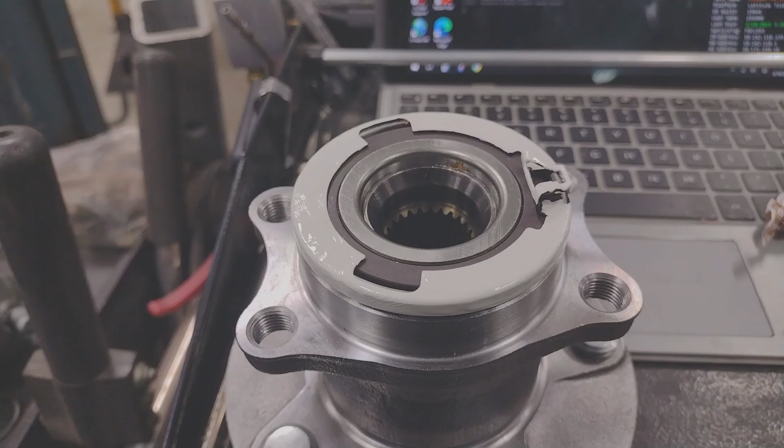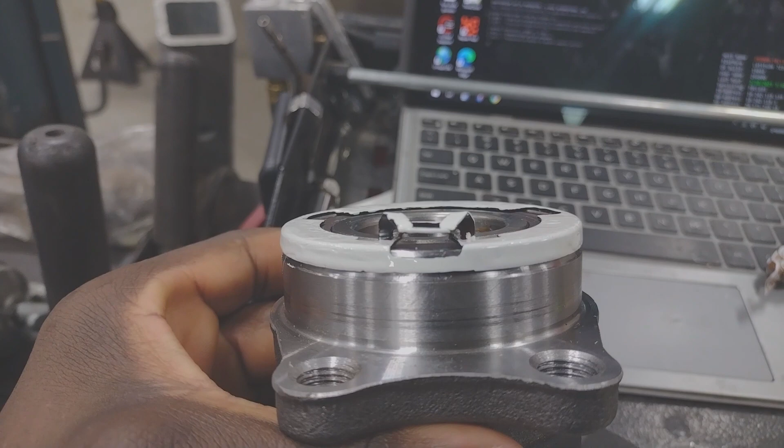Alright, so I painted it. I'm just going to paint the right rear, and it'll be a good comparison with the left rear, just to give some extra level of protection. Obviously I couldn't get all the way into certain areas where the sensor slides in. I don't want to make that area any worse in terms of clearances, so I didn't paint it.

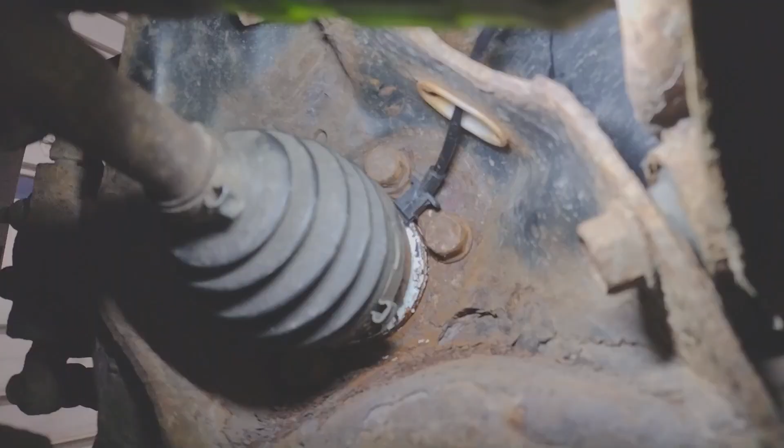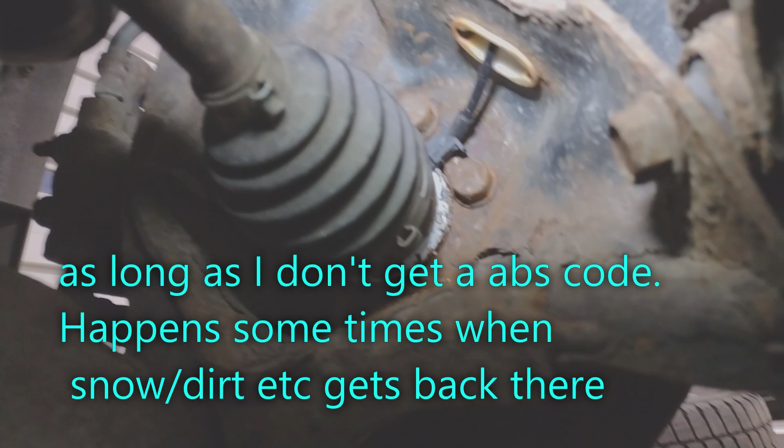Alright, I got the new hubs in, and there is some scratching going on, so the paint isn't really intact. My thought process is this is probably going to have another lifespan of 3 years. I'm guessing if I mess with it. If I don't touch it, then I should be okay. I'm going to show you the old hub.

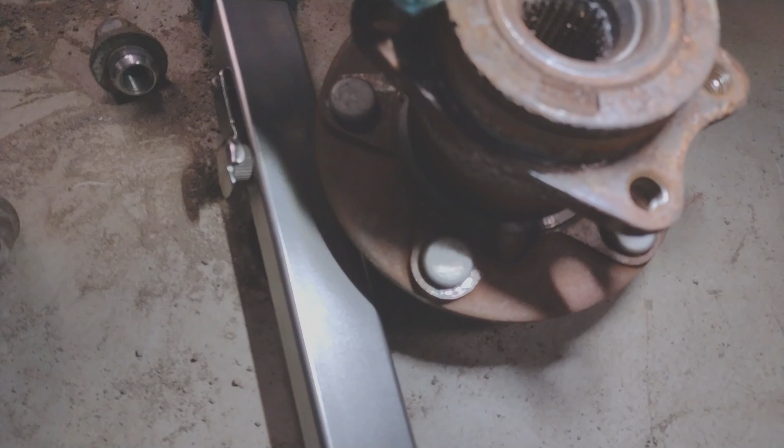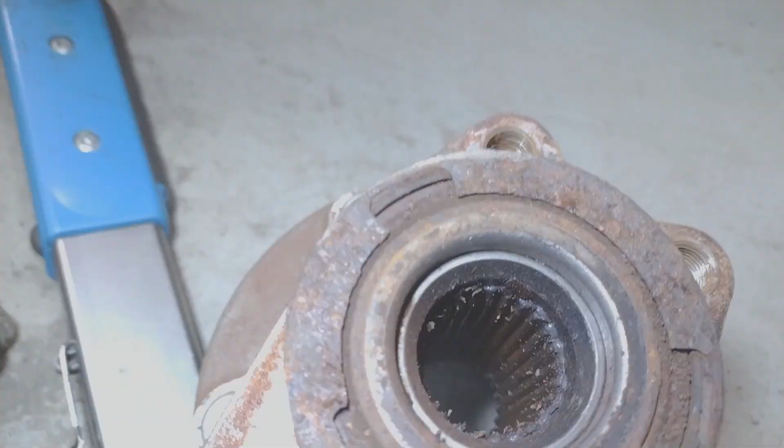Alright, this is a good side. This is the driver rear, and the clip is still intact, but it's super rusty. That's as far as I can tell with this one. That magnetic ring where the ABS reads, it does look a bit chewed up. That's hard to tell, let me see if I can focus. It looks a little bit chewed up. Well, there's so much rust - rust is getting between the ABS clip and that reluctor ring there, and grinding it down.

This side read decently, good enough that it didn't throw a code after I replaced the sensor.

Let's look at the really bad hub, which caused me all the issues, and it's always at the right rear. So let's take a look here. That clip is busted - like, it's wiggling there. It completely just disintegrates in my hand. I just don't understand.

It's possibly because the suspension back there does have surface rust. That's my guess, that everything back there is getting rusty right away. But this design is just flawed, in my opinion. The ring came off while I was hammering it out, but there's a groove in there with all the dirt getting in between and constantly grinding on it.

So I'm gonna go ahead and do a road test with the scan tool to see how the ABS reads now. But I'm sorry, the video is just blurry, I gotta change my focus.

I wonder if anybody else has this issue who drives in the elements, because I'm in northeastern Pennsylvania. This probably won't be a thing for long, because within a couple years I'll probably just buy a newer Outlander where I won't have this issue. This issue is only on certain models of Outlanders and Lancers.

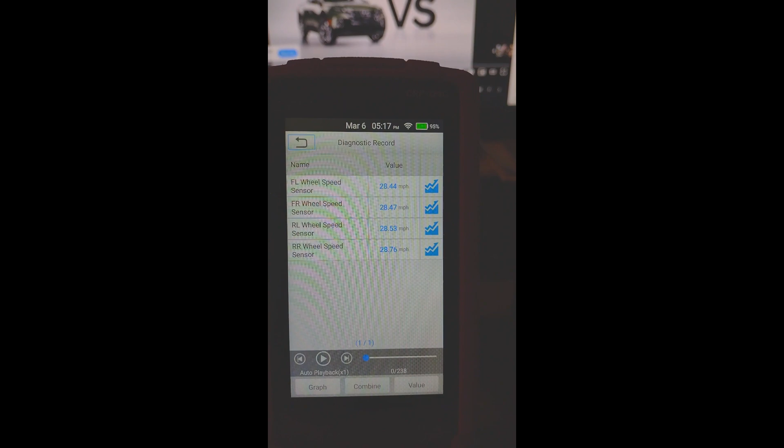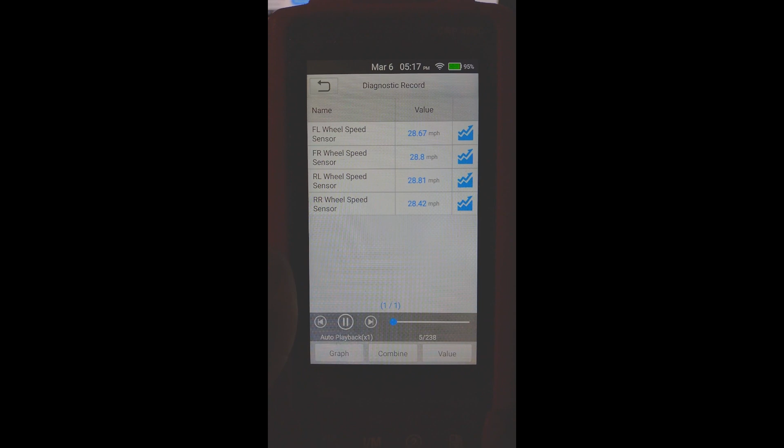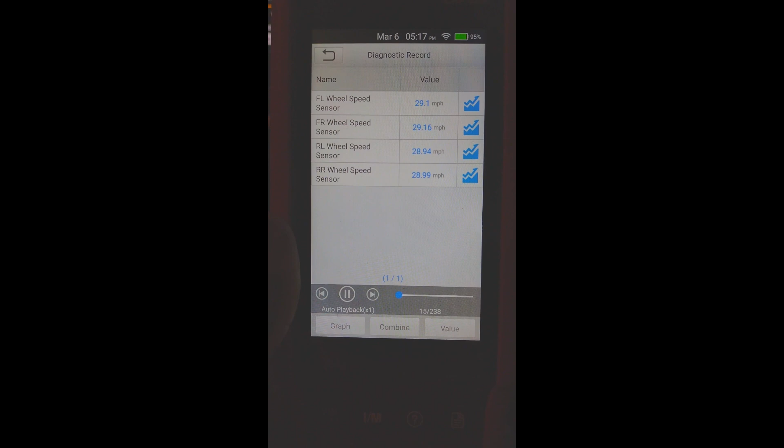So I did the log after I replaced the hub, so I'm gonna go ahead and play it and show you exactly how it's reading. Alright, so it's reading pretty evenly. I'm gonna go ahead and hit the graph button, and jump over here.

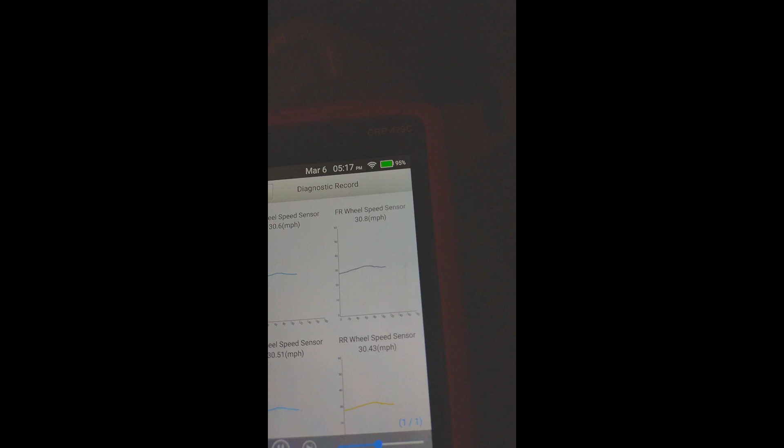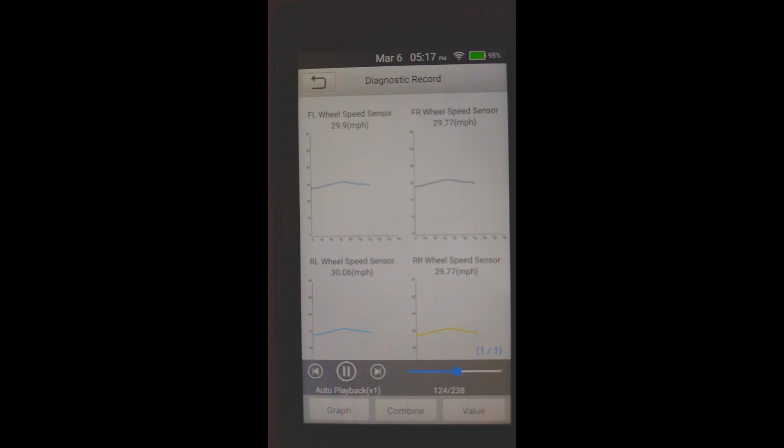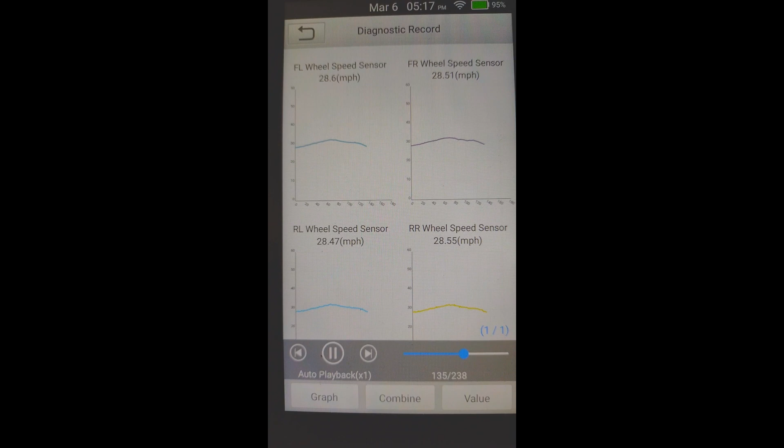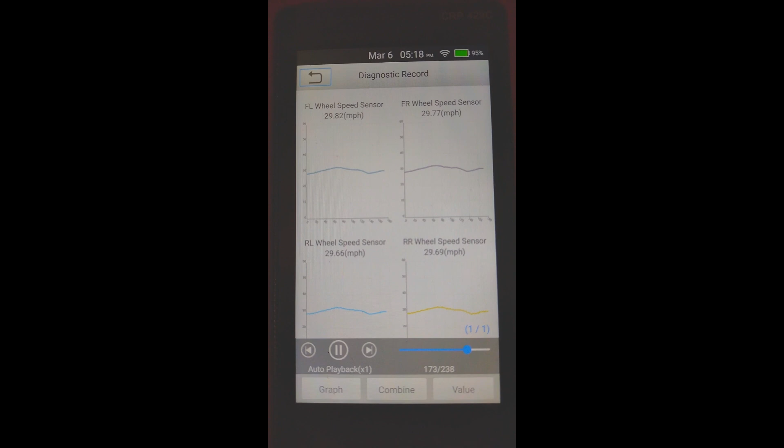But you see how smooth the graph is compared to how it was before. The rear ones aren't as smooth as the front - let me see if I can get a better view. So the rears are not as smooth as the front, and I think it's just because of the hub design. There's going to be just a little more variation. I was going to say the system is not as picky - it is, but it has its window for how picky it should be for the sensors. So the rears are pretty close to the fronts, pretty even. A little bit fuzzy there in the graph, but everything is going well.

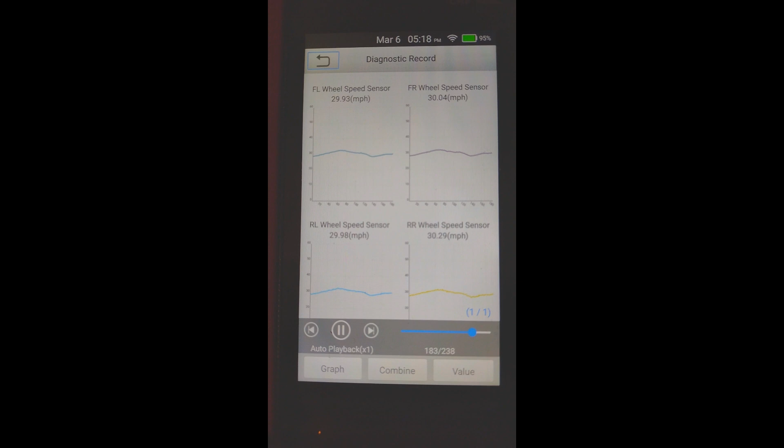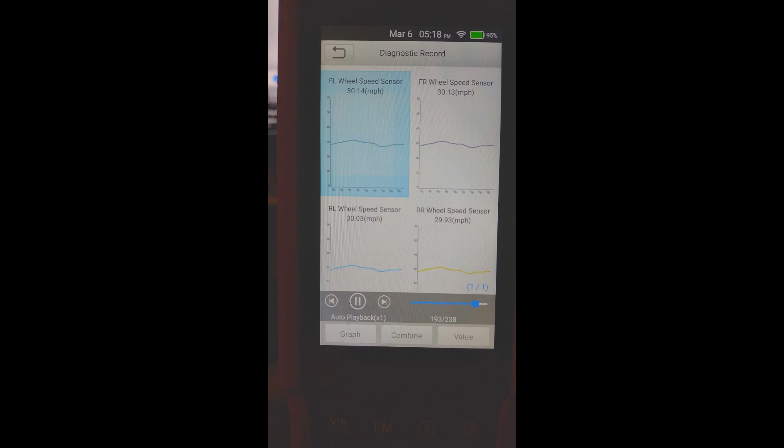Yeah, this wraps up my ABS issue, hopefully for the rest of this vehicle's life, because I'm not trying to come back here and do another hub. That was a pain to do that hub. For being on there for the short amount of time it has been, it really froze up.

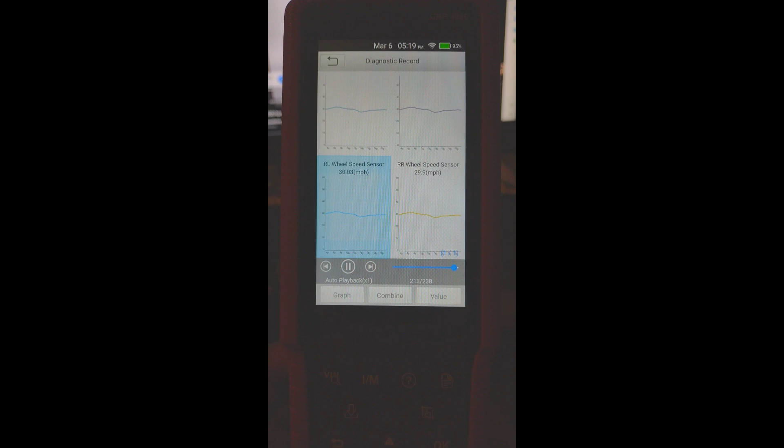So yeah, hopefully this helps someone out who's in the same spot that I was in, and hopefully that helps you figure out the issue.